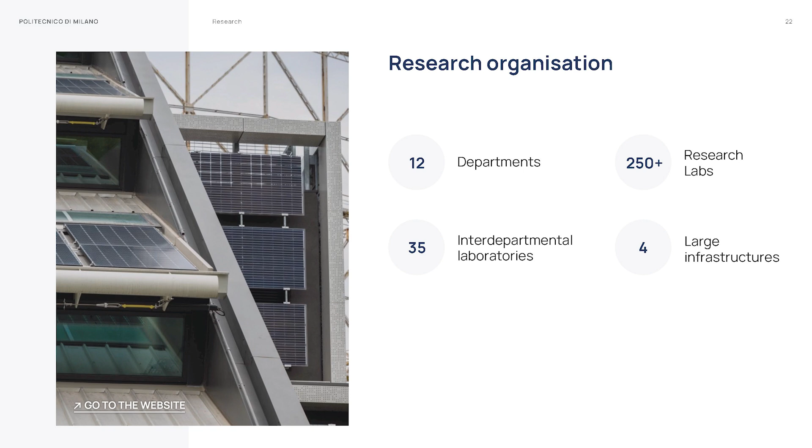I will just finish very briefly—sorry if I skip, I didn't clean up the presentation—but just to give you an idea, we also have research, the other big business of our institution. We have 12 departments and research labs. The three of us come from the second department on the left: architecture, built environment, and construction engineering.

There are essentially two departments dealing with architecture. One is more at the scale of the city and territory, and urban policies—that's the first one at the top. The second is a bit more at the scale of buildings and building technology, structures, energy efficiency—some more technical aspects, if you want to separate them that way. Then we have plenty of other departments dealing with different engineering topics.

Okay, and then we have infrastructures, and I think that's enough—we don't care too much about all these other aspects. And social responsibility programs—perhaps because we talked about social responsibility in the introduction—we do have a third line of action, which is what we give back to society as an institution. So we have a lot of projects with especially the more deprived areas of the city or the more deprived part of the population. We try to get out of our gates and do projects that involve their communities, and we have a very strong sustainability plan, equality, diversity and inclusion, and so on.

We even have some small offices in difficult neighborhoods that try to support people in decisions—for example, if someone wants to renovate their house, what should they do? Most people don't have the tools to know what to do, or know that they can access funding, including public funding. So we're there physically in these neighborhoods to help them, and I think that's an interesting way to be present. Okay, polimi.it—if you're interested, you're very welcome.

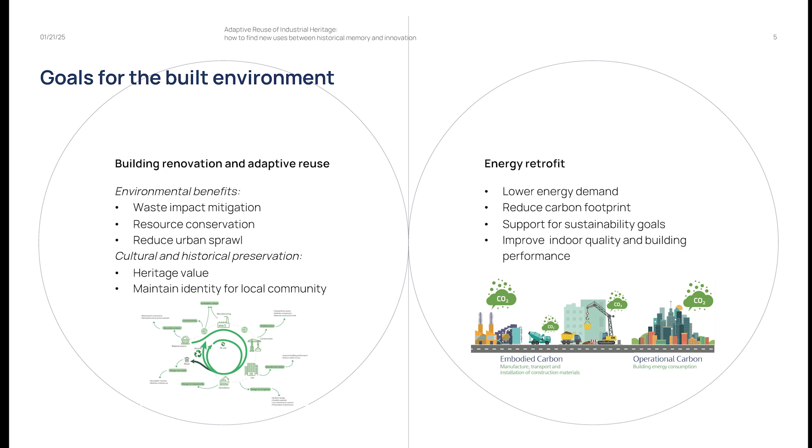Shortly, what is the adaptive reuse process? Again, typically sometimes we select a new function to transform the building, but from a research point of view, for sure we have a specific process.

We have to recognize, first of all, what is the value of the existing building and why we have to maintain and readapt it. I selected again four keywords. First of all, the history value.

We come from Italy, so Italy is famous for historical buildings. We have a lot of restrictions because sometimes we cannot touch monuments. But again, we have also a moral duty to maintain and pass to the future some aspects of our history of architecture.

Another important aspect is the building quality. Sometimes, even if it's not a piece of architecture, the quality of the building gives us a path to be followed. So why demolish a building that has quality when we can renovate it?

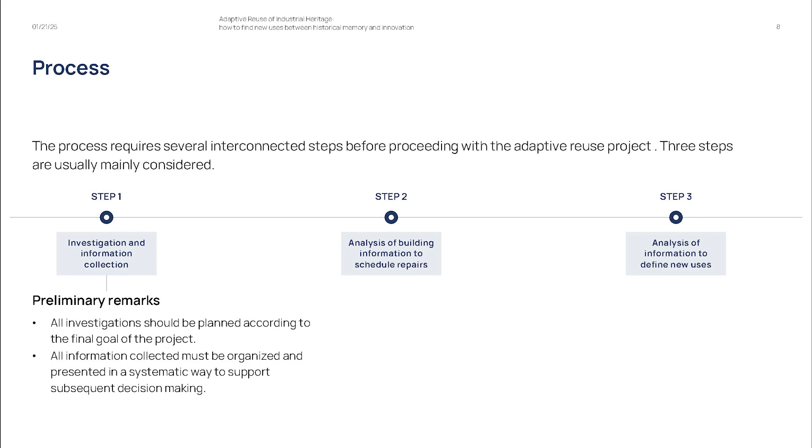The third step is really important in this moment for my lecture, because it gives you information related to the possible new uses you can introduce in an existing building to transform sometimes not just the building itself, but start a process of regeneration.

Just to give you information, we start not from the building, we start from the urban dimension, because of course before defining what is the possible reuse, it's necessary to connect the building with the surrounding, with the neighborhood, to discover if there are some elements that can suggest the possible reuse and transformation.

Of course, many information related to the building scale, because typically we need to know dimensions, we need to reconstruct the history and transformation of the building. We need to recognize some architectural value in the building itself.

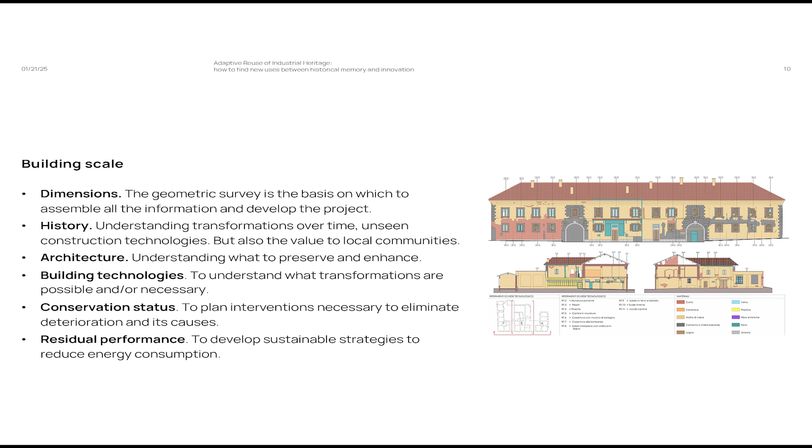And of course, one of the very important parts regards the building technologies. It's difficult to know what are the technologies they used in the past in that specific building. But connecting main information, typically the location and the date of the building, we imagine what can be the real materials they use in the construction. Conservation status are other aspects.

And for sure all the rules related to the possibilities, because in Europe and in Italy we have a lot of restrictions, so we cannot transform a building, for example, not considering the possibility in terms of volume I can realize, or some specific local rules.

So it's a circular process in reality, because when you start to imagine possible new uses, what is important to do is the analysis of the context impact assessment, because if the reuse is wrong, you stress the neighborhood. So it's important, again, to connect everything.

Building on what is already built. Of course, it's a sort of slogan.

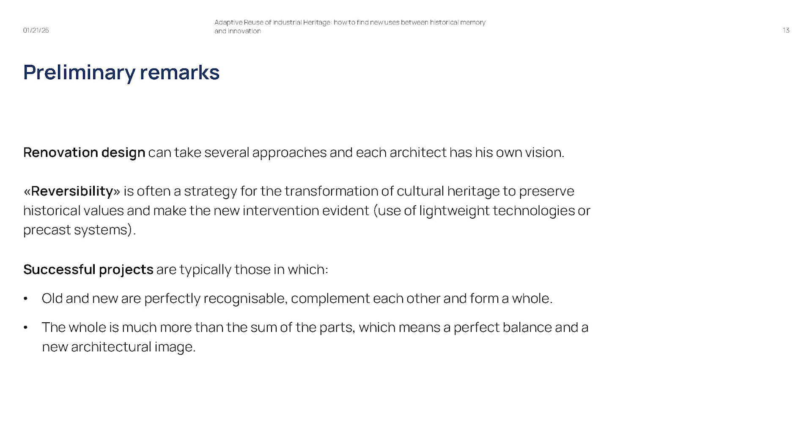Four aspects, of course, we can find many other aspects. Again, I find the nicknames, fill the volume, which means that in some examples you cannot touch the architectural value of the building, so to transform it, you have just to readapt the layouts, the existing layouts, and give a new function to the building.

Most interesting is boxes inside the volume. Maybe can suggest something related to the transformation of your building in the workshop, which means that in this case, typically, we adopt this approach when we have a huge building, industrial heritage. So we define what are the spaces that need to be well controlled in terms of air conditioning, plants and so on, and what are the value of the other parts, but I have examples of that, of this approach.

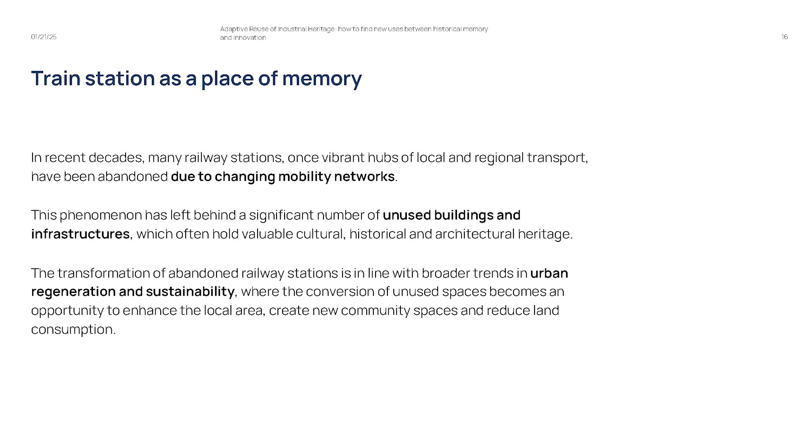Industrial heritage, the case of disused railway stations. You can find many examples all over the world of transformation, because typically the huge stations realized at the beginning of the 20th century are now abandoned because of the changing mobility network. So how can we reuse them? Sometimes it's not necessary to maintain them, but sometimes it's better to renovate and readapt this railway infrastructure.

To introduce the topic, typically we have two parts in stations of that period. The first is typically designed by architects, so the value of the building is in the relation of the building with the city. The second part I like a lot, because it represents something really important: the innovation in the engineering part, because of the new structures that allowed the construction.

Examples - I have to rush. The two first examples I selected, maybe you know very well: Gare d'Orsay in Paris, maybe you visited it, and the second one is a transformation of part of Manseibashi station in Tokyo.

Gare d'Orsay is now a museum, maybe you know it well. It was a typical station. You can appreciate in the image the value of the building. It wasn't possible to transform it in reality because it's a monument. When they abandoned it, they decided to transform it into a museum - so they selected the function.

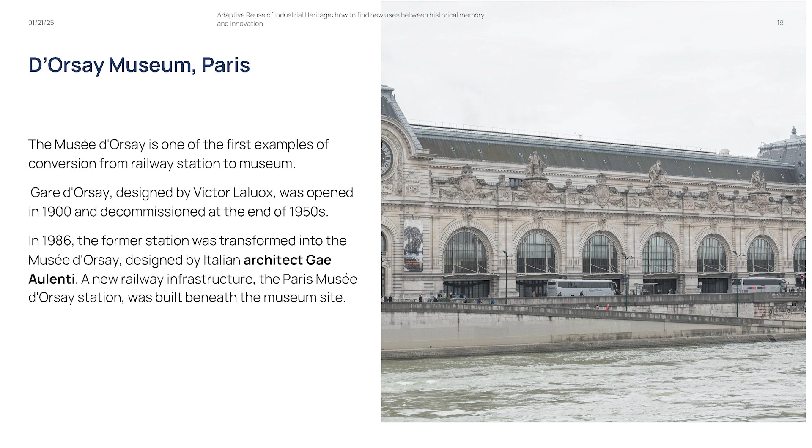The chance was that the natural light was really good also in the original building. That's why the light, which is really important in a museum, was something already present in the envelope itself.

The use of materials is an aspect that's really important, because in the meantime you enter the building to visit the museum, which is a famous museum with masterpieces of Impressionist and Post-Impressionist painters. But in the meantime, the visit is also to the building itself, because it's immediately visible what is new and what was part of the historical monument.

The integration is important - nothing is covered by the intervention. So the relationship with the structure, which was a cast iron structure really important for the period, is still visible.

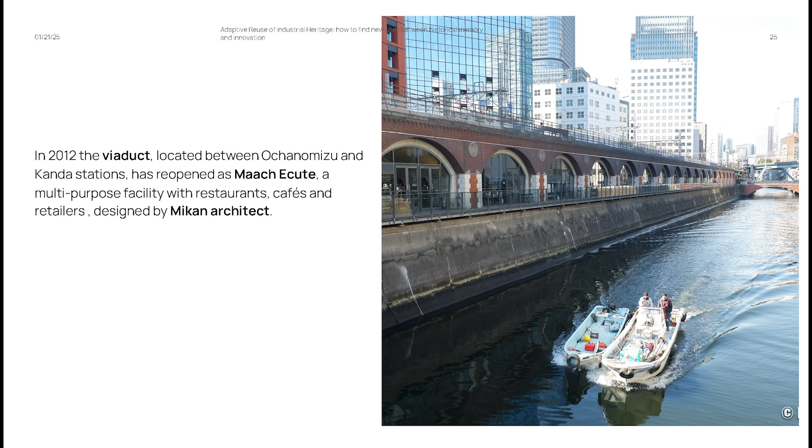It's really interesting - an urban scale intervention, because the possibility to remove the original walls and open these parts creates a relation between the main square and the opposite part, which is the river.

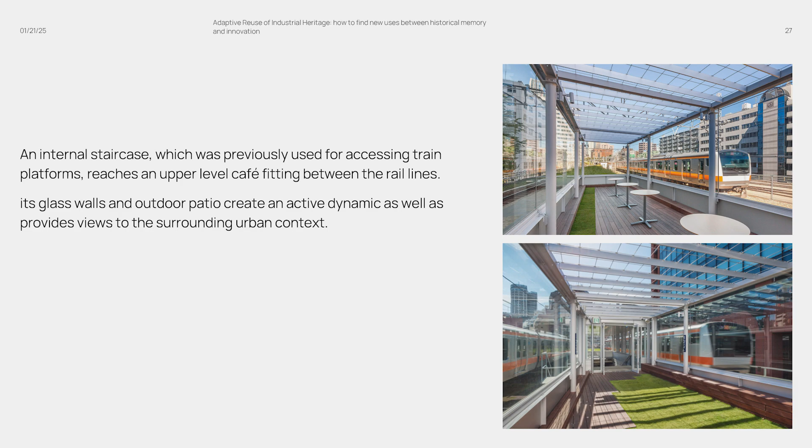Typically we reuse these spaces for commercial purposes. In the upper part, since the line already exists, they introduce small elements dedicated to bars - boxes inside the volume. Maybe they are really interesting for the workshop, why not?

We'll discover two European examples. The first one is in Spain, in the south of Spain. This station was really important in that period, because it connected this region with the capital of Spain.

When they abandoned it, the local community wanted to maintain and preserve the monument. In 2012, they wanted to reuse this building. Now it is the headquarters of Casa Mediterraneo, a diplomatic institution that has to promote the common identity of Mediterranean villages.

What is interesting in this case is that the designer, Manuel Ocaña, had to design a building with a real low budget. This was the original situation - it's a bit similar to your station.

This is the transformation. What is important is the definition of what is temporary use and what is permanent use. The huge part, which was the space where the trains arrived, is now an open space - a sort of covered square where they can organize many different activities, such as exhibitions or other things.

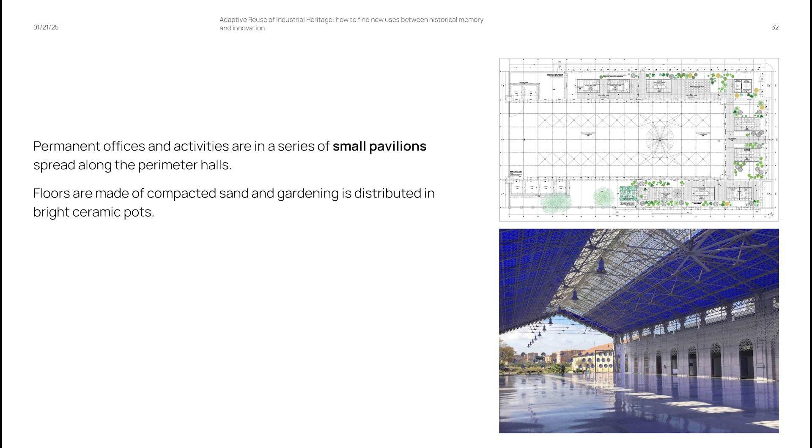Activities related to the headquarters are in small pavilions that surround the main square. Here are the pavilions again, not many materials. So in this case, the ceiling, the roof, is transparent.

So to protect the people that work inside the pavilion, the roof is opaque and the natural light is filtered by the vertical facades. Of course these spaces are controlled with plants, which means they are air conditioned and so on. Because for temporary uses it's not necessary, it's a passive strategy. So we use the envelope to create that climate situation.

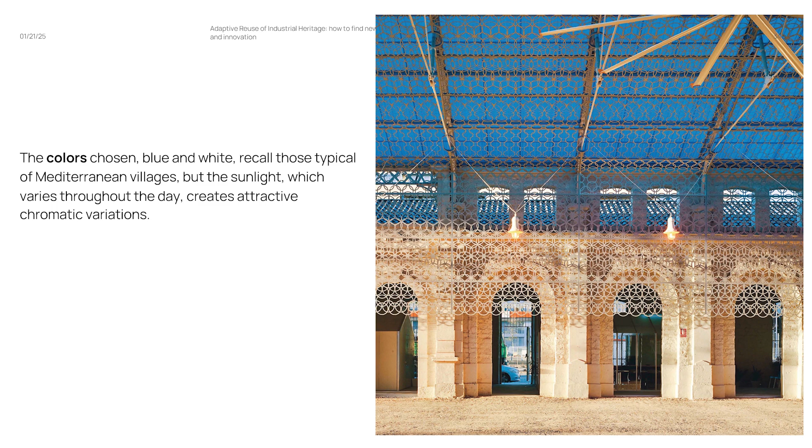Why the colors? Because they are typical of Mediterranean villages. White and blue are the two colors they use. But be careful, because when you use a transparent surface, the color of the sun will create different colors inside. The second one is similar.

It's in Belgium. In this case, a huge station, really important. The strategy is totally similar, but the climate is totally different. That's why they organize it in a different way.

Again they put pavilions inside to reuse the building, but they also create protected public spaces because of the dimension of these buildings. They can also create sorts of boulevards, green boulevards, in between the pavilions.

In this case the material is wood, so again not too many materials, but typical glass for sure, and wood also for the structure, and the pavilions are 3 floors high.

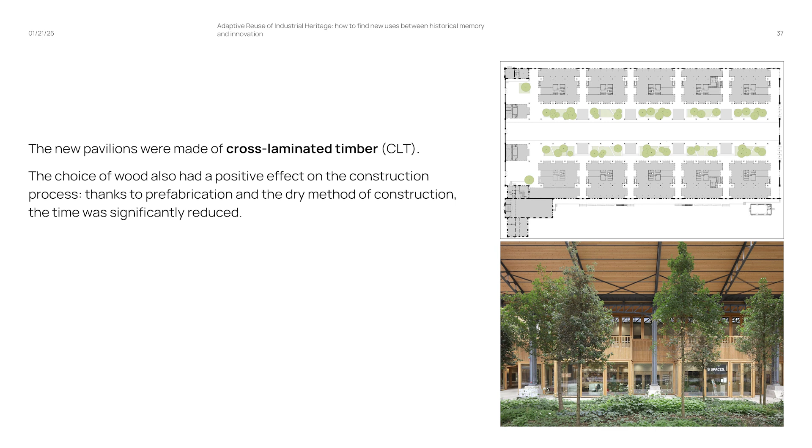Here are some images. It's really interesting because of the climate, vice versa - it's a rainy region, so it's in a cold region. That's why you can create a protected part of the city. It's a sort of building and urban scale at the same time.

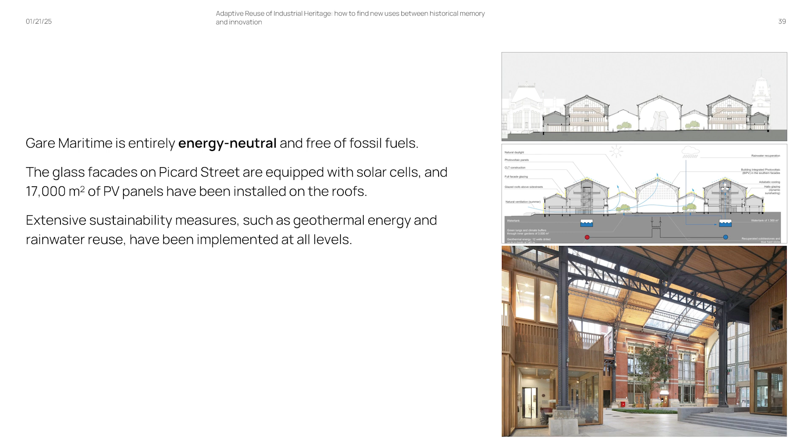It's really interesting also because it's an energy neutral building. They use a main glass facade that is integrated with solar cells. All the roofs are photovoltaic panels, and they also use geothermal energy and collect rainwater to reuse it for the green side.

Finally, a really famous intervention, the High Line. I selected this one because it's a bottom-up regeneration. What is it? Of course it's a beautiful intervention, but what is interesting is the process.

Today the High Line is really famous. It was a line that cut through this neighborhood. When it was abandoned, immediately they wanted to demolish the line because they considered it a dangerous place. Vice versa, the people that lived in the surrounding neighborhood, an industrial part of the city that was abandoned, typically young people and artists, started to reuse those buildings.

So they started to discover that naturally the green grew inside this line. So they wanted to maintain it and convince the administration to maintain this line. They created a non-profit association, the Friends of the High Line. They started to collect money. At the end, they convinced the administration to maintain it, and they started this process of regeneration.

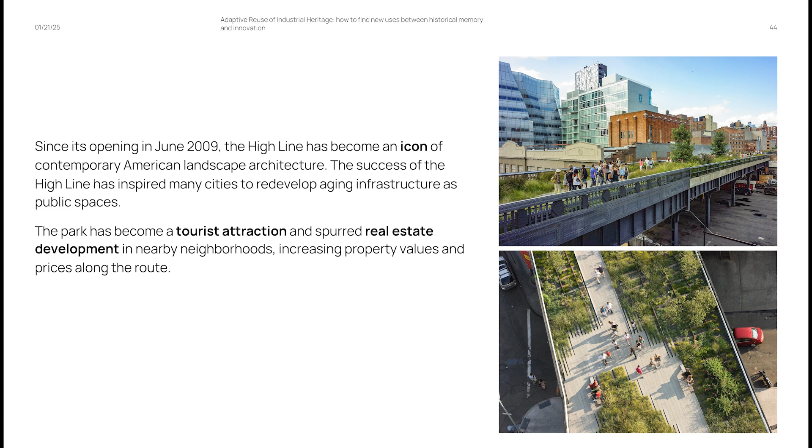At the end of the High Line, now we have an important building designed by Renzo Piano, the Whitney Museum, which creates the element that concludes this intervention. Thank you very much.

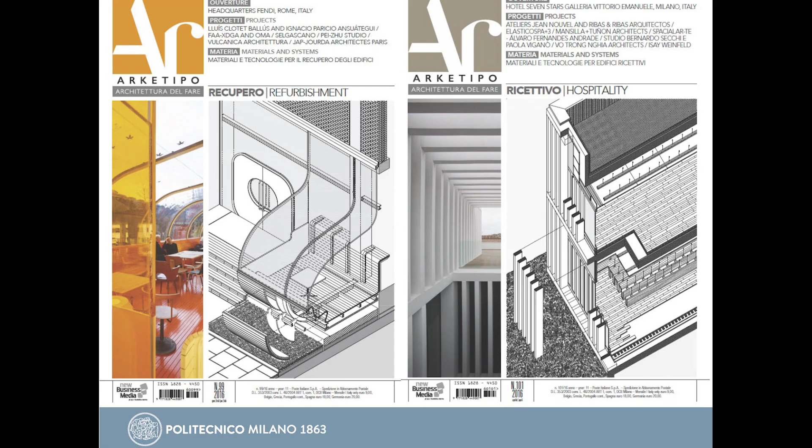The first is that I'm an editor of a magazine. To do a magazine is really exciting. And I'm also a curator of an architectural festival. This is Arketipo. Arketipo was born in 2006. Now we are at issue 180.

Every month we speak about a topic: refurbishment, hospitality, envelope, building where there is no possible entrance — these are only examples. As you may understand from the topic, the concept of the magazine is that we need to speak about the construction of the building.

We work a lot with the drawings, the technical drawings of the building, which we redraw. We search the drawings from architects, engineers, etc., and we redraw these buildings. We do something like this.

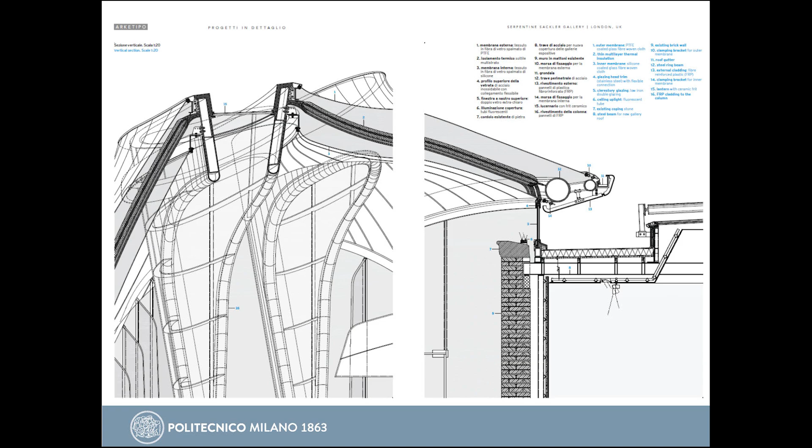I talk about this because the two stories that I tell you tonight are very much related to the work of Benedetta.

The second thing in the introduction is the festival. I think it's important to talk about this because Milano Arch Week is something like this. Every year, for one week, all the city of Milan, our city, is covered by advertising because we talk about architecture. We organize more than 100 events in all the city, the center and the peripheries, and we talk with citizens — we speak about architecture because we think architecture is a real agent to change society, to give a better life to the people.

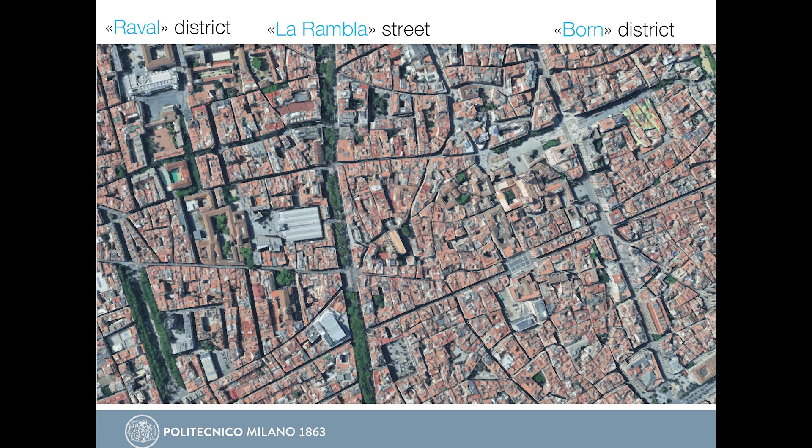This is the museum realized by Richard Meier Architects, and it is very related to this very old district. The people immediately loved this new museum, and this space is so full of people every day, at every hour, that the problems of violence and theft disappeared, because people arrive to see the museum, and so the problems disappear.

This is the other building, designed by José Luis Mateo. It's related to the cinema of this region, and you see exactly the relation between the old city — a very old city — and this new important building, very much in contact, the old and the new together.

So we are now in Bangkok. Here in Bangkok you have a lot of markets. Market is important for you. It's not exactly the same in Europe, but in Spain it's exactly the same. Also in Spain, markets are really important for public life.

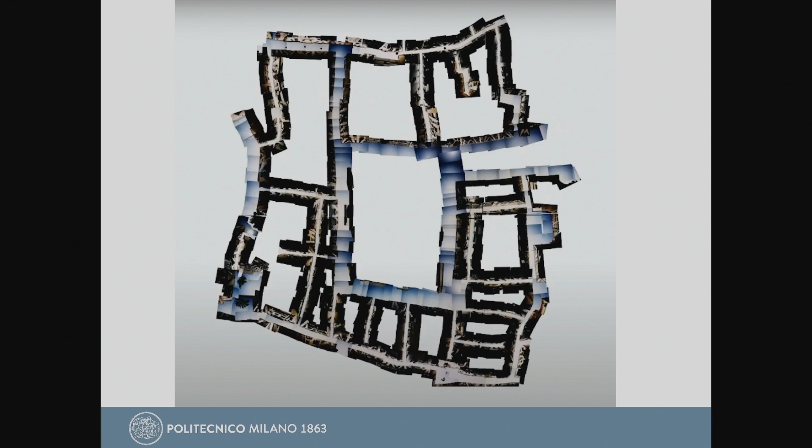Benedetta studied a lot with one of her tools: the collage of images. This is the collage used to understand what is around the Santa Caterina market, to understand the life before the transformation.

She worked a lot, and decided to break the rule of the competition. The competition only asked to refurbish the market, but Benedetta decided to participate with a project that didn't touch only the market, but also all the streets and districts around it, because she had the idea to open the street, demolishing some buildings.

She imagined that when tourists are in front of the cathedral and see something really interesting and colorful there, they need to go there. If they arrive in front of the market, they see the light, they continue, and we have a lot of people in this district, so the violence disappears, the problems disappear.

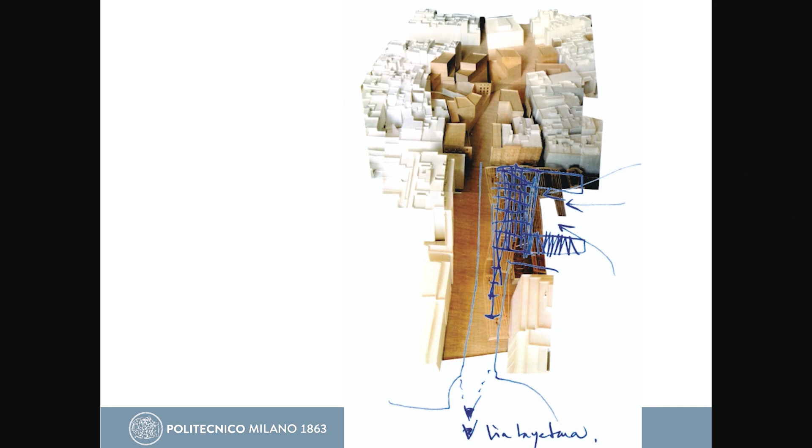With many sketches and ideas to understand the better solution. These sketches show the idea from the cathedral: you have to see the market, so it's necessary that the roof of the market go into the street with color. She had a lot of ideas, for example the drawing of the roof as vegetables.

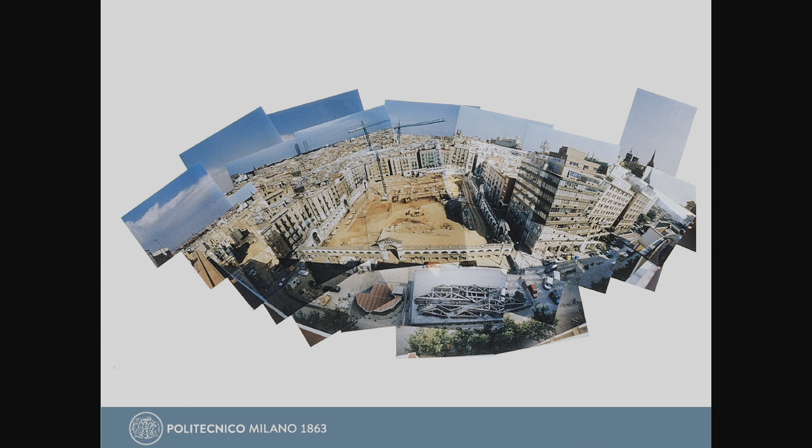More sketches, and Benedetta won the competition. She reused part of the old roof and decided not to touch the external wall, so it's very important to always see the old part and the new part. The old part is in brick and stone; the new part, the new roof, is wood, steel, and ceramic tiles.

When they started the work, they found the remains of a monastery that was here, because in Europe there is a lot of history, so we always find something.

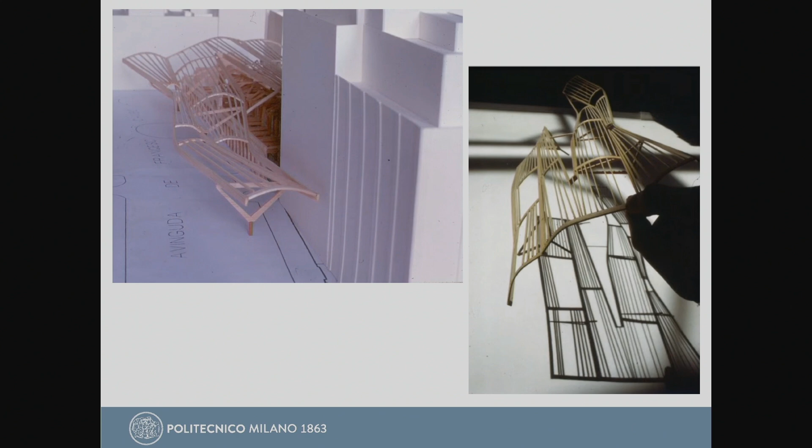This is a study for the pergola, and a lot of maquettes. Benedetta works a lot with her hands, with wood maquettes and cardboard maquettes. This is always the final result.

She needed to integrate housing for elderly people too, because the strategy to have people here is always to have different people of different ages.

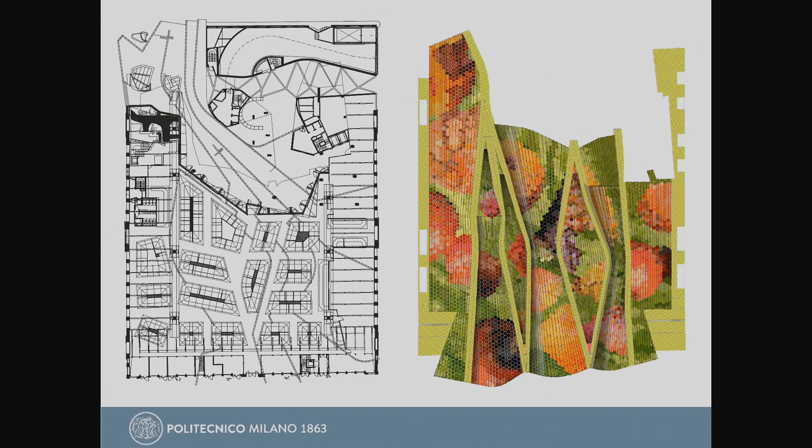This is the image from the cathedral. From the cathedral you see something like this, so there is an attraction. It's absolutely possible to work into the market, and it's quite a covered street, a new covered public street in Barcelona.

These are some images of the construction interior, the existing roof reused, the houses. This is a collage of material for one of the walls. It was really complicated to realize so many colors for the tiles.

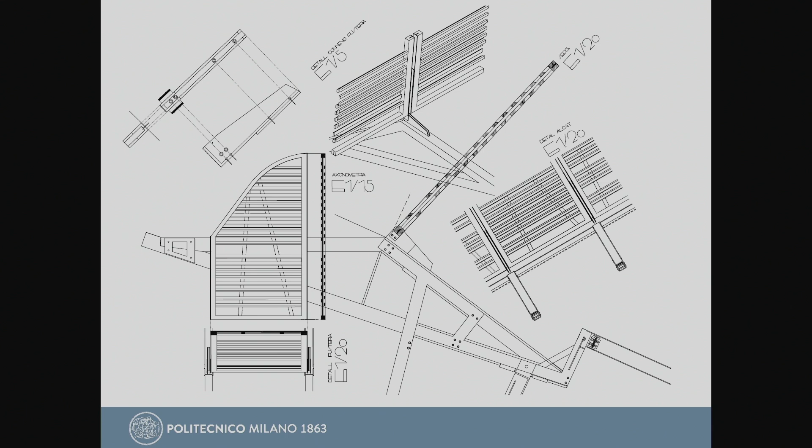And absolutely, as always, a lot of drawings to make this construction possible. In Benedetta's strategy, there is always the idea to work on public spaces and landscape design, because it's necessary to bring the city into the building, to break the difference between interior and exterior.

For example, this is the project for the Scottish Parliament in the north of the UK, where it's very cold, and she designed these gardens and this public square. She always needed to use water as an agent and element for life. This is a very big park in Barcelona with a lot of water.

It was one of the very first operations of real estate in Barcelona to build a lot of new buildings, and she realized the park into this new operation. The idea of Benedetta is always to play with forms, to play with something that is really much related to the life of the people, with colors, with curves, with surprise.

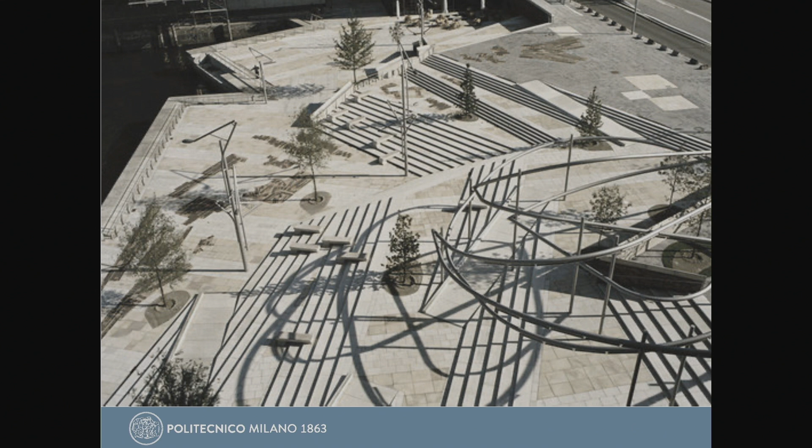This is in another city, Hamburg, in the north of Germany, where with the cold the people don't live in the streets. Benedetta changed this idea and realized this very particular, very designed square, and now all the German people need to go outside, and it is a very important transformation, this use of the public space.

And this is the last one, in Italy. In Italy there is a very important city for the sea named Rimini. It's quite like Phuket, it's plain, with a lot of people. Rimini had a very big problem because there was quite a separation between the sea and the city, and Benedetta, with this project that mixes pedestrian spaces and green spaces, breaks this division with the city.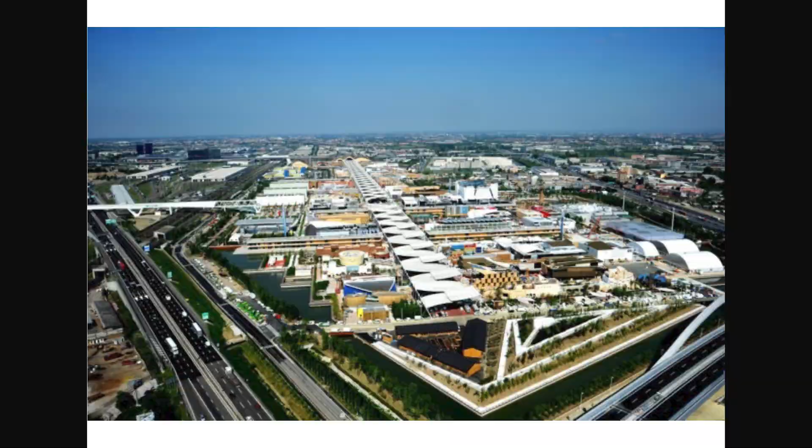It was a city with a lot of problems, a lot of spaces impossible to change, and with this big event, also the politicians, also the people, also the investors, so the private sector, needed to arrive in Milano to make a better city. And so this was one of the images of the Expo.

For example, the really famous Bosco Verticale by Stefano Boeri is one of the architectures realized in one of the districts completely transformed after the Expo. And so, with the enormous success of this building that is really known in every part of the world, Milano became really famous in the world of finance and also in the architectural world. And so we have a lot of projects now in Milano.

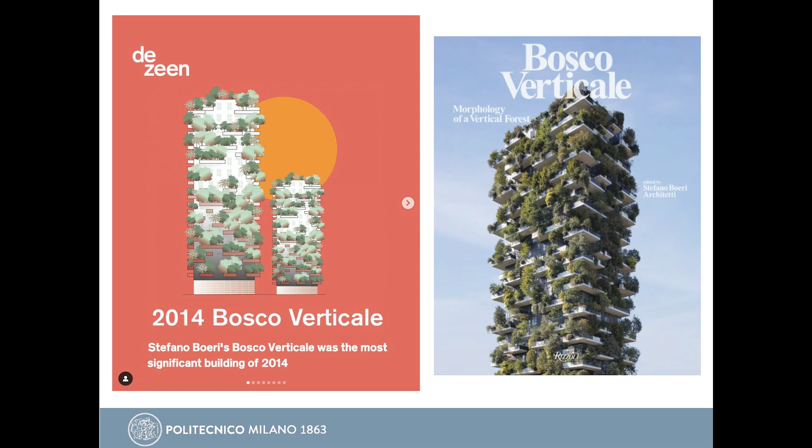And this is the second story. The second story is about the transformation of 7 big areas in Milano. These areas were the railway yards of Milan, because Milano is a city with a very interesting and recognizable geometry.

One circle was the ancient walls of the city, and one of these circles was water, because Milano was quite a little Venice in the past, with a lot of artificial canals, and water was really important for the city of Milan. In this moment we have only one part of this canal, and the other was covered to make streets with cars. This is the situation.

In Milano there were 7 railway yards in use, areas owned by the railway of the state, the Italian railway, and they used them for operational rails. But there is no reason not to use these areas, because the economic value of these areas is really big, and so now we need to change this area and create a new district.

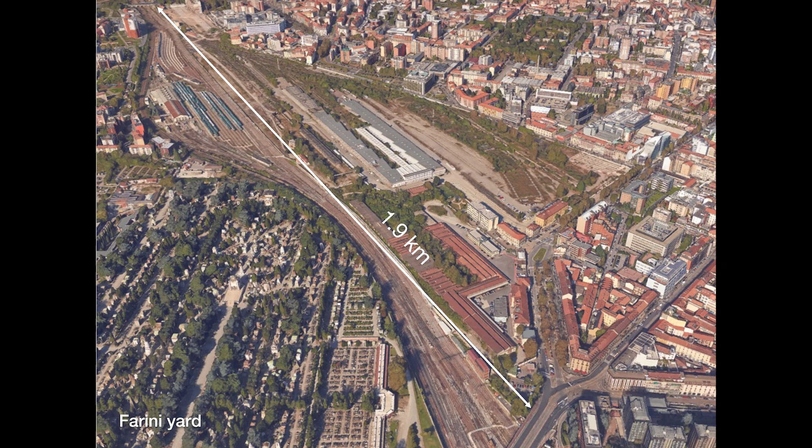I was born in Milan, and when I was here, I understood for the first time that it's really easy to go from here to here, but I don't think people believe that's possible, because usually to do this we go around. So for us it's far, but it's not far, it's really near, but it's a hidden space into the city. It's a great opportunity to enter these railway yards.

This is also the main Farini area. You see, this is the center of Milano with the skyscraper. This is Bosco Verticale.

So it's a really great opportunity to recover these yards, but it's absolutely really difficult, because the private need to gain money, to have a lot of money with this operation, and the public, the city, need to have a park, to have public buildings, to have a better life. And so it's not easy to find the good solution to start this operation.

And so what did Milano do to start with this operation? They start with a workshop open to all the citizens, a workshop open to all the citizens to speak about what you need in these spaces, what is your idea of the life in these new spaces.

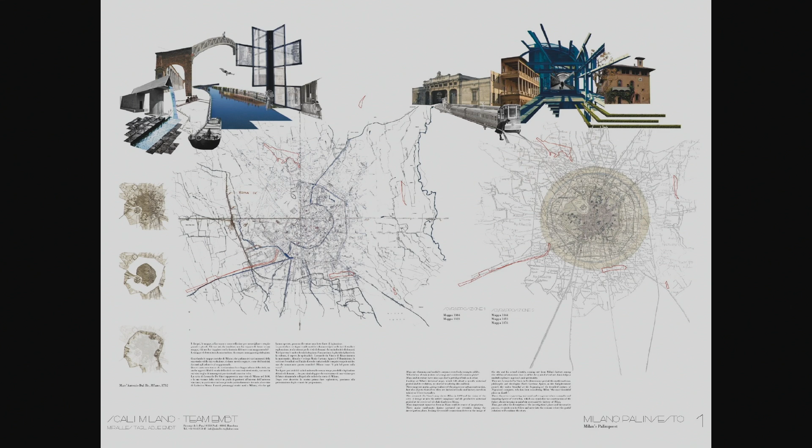We play a lot. This is the manifesto. Manifesto is manifest, but in Italian, mani is hands. And so for us, this is the manifesto we do with the people of the city to understand the idea the people have about these new areas.

We study a lot the story, the circle of Milan, and we start with this, that is a summary of our ideas. For each of the 7 railway yards, we give a new name of this district because we think it's important to preserve the memory of this new area, and so each area's name starts with the word scalo. Scalo in Italian is a railway yard, and after scalo there's always a word that conveys the main function of that area for us.

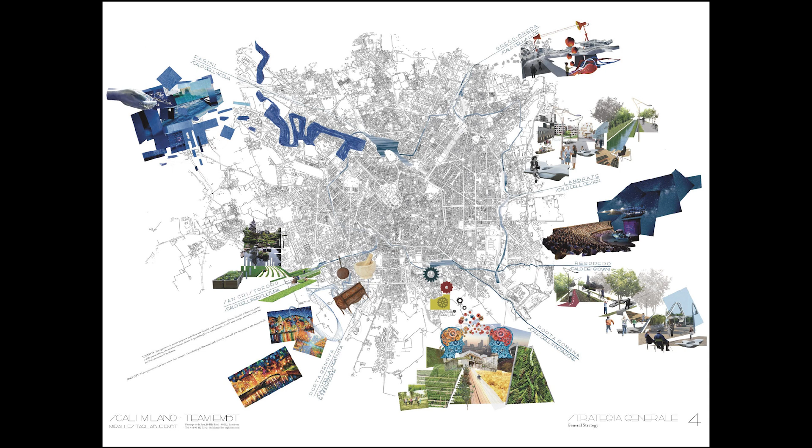And so this is the scalo, the railway yard of innovation, the railway yard of young people, of design, of the light, of the water, of agriculture, and of creativity and design. We study a lot to arrive at these 7 ideas.

We do a lot of collage to understand what is really important, and one of the things that was really important for us is to rediscover the water in Milan, and to have water in all the 7 areas.

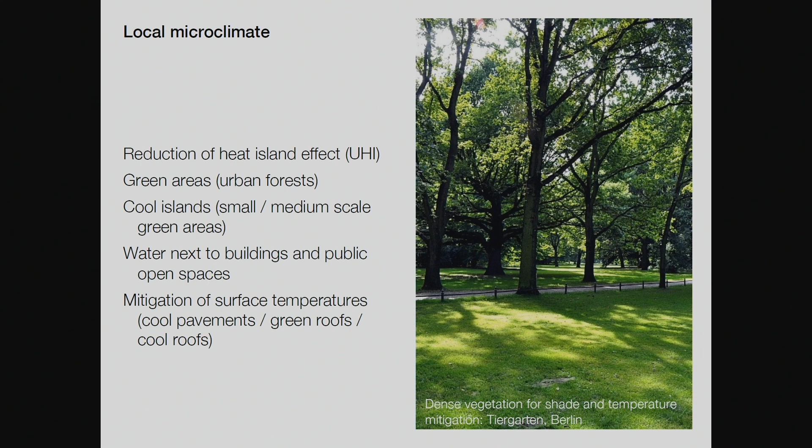We understand that it was absolutely necessary to do a lot of strategies in all the 7 areas: cool islands, green areas, water, mitigation surfaces, color and material that can mitigate, of course the water, and also strategy about the shading, for example the green gardens. But there was a lot of words, a lot of text to explain our ideas.

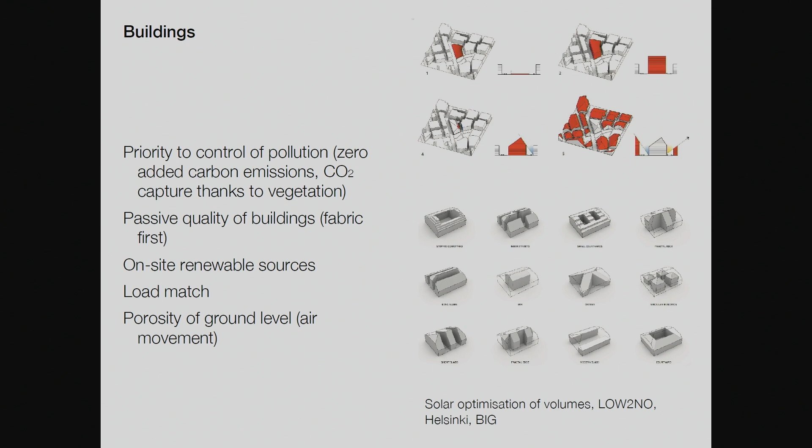We study also rules for the shapes of the buildings, for the heights of the buildings, the technology that was necessary to have, the study that was necessary to do to have good buildings in that area that is into the city, and so with a lot of construction.

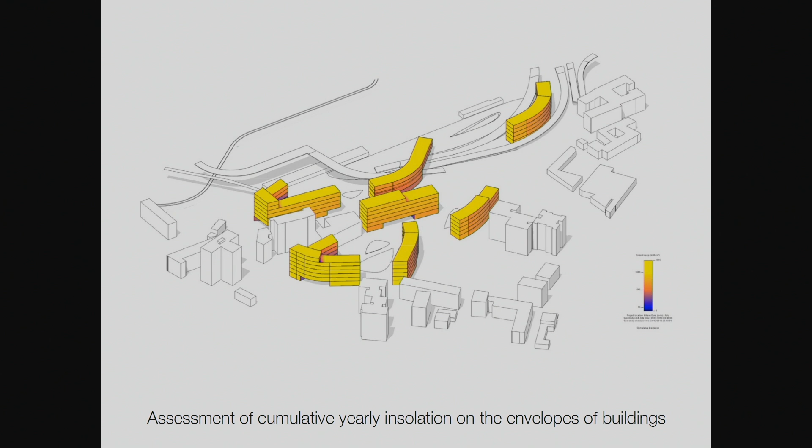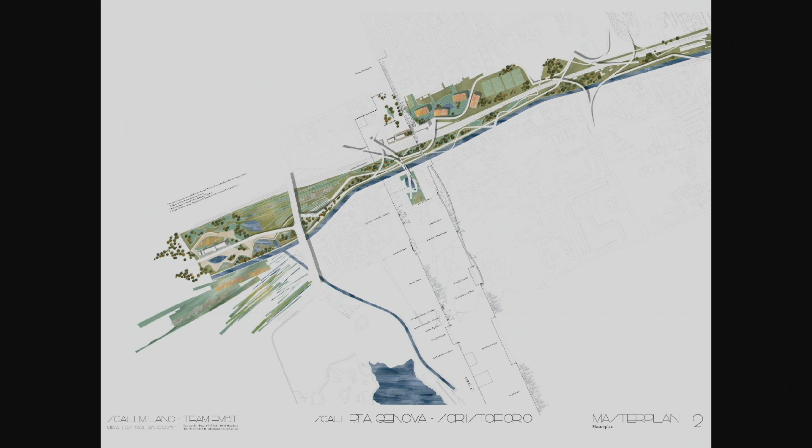And this is real. This is the old harbor of Milan, and this is the only canal that we have in this moment. The shape of this yard is strange because it was for the train, not for the people.

And you see, this is not a real project. This is like a concept. We say a vision. This is the impression. It's only the impression, not real buildings, not real facades. This is the brief we have.

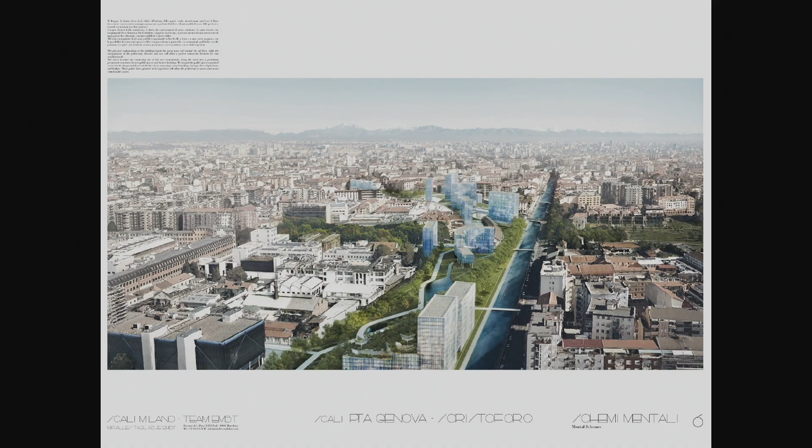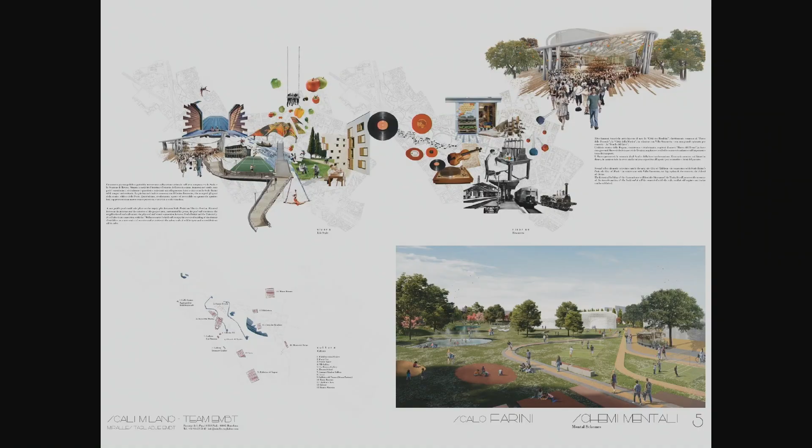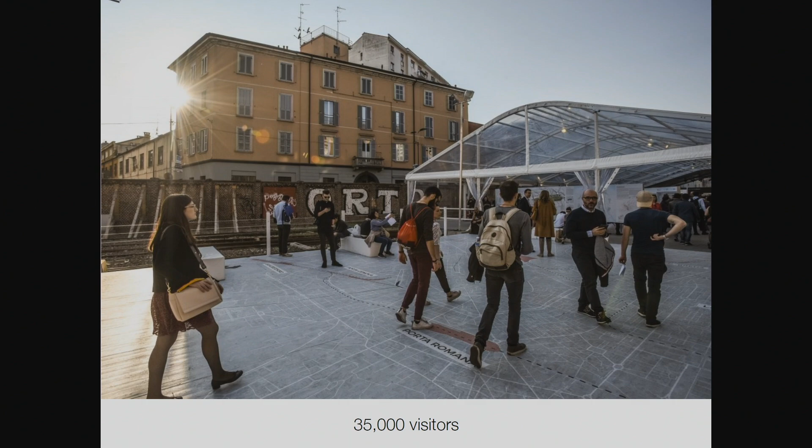After this, the 5 teams present to the city the results, the ideas, during the design week. That is the most important event we have in Milan, with a lot of people from all over the world that arrive in Milan. The event was in one of these scali, with a lot of people, and we talked about our vision. This is Benedetta. This is our manifesto with our collage.

And so after this, the city decided, okay, for us it's okay, we can sell these 7 areas to private developers to completely change these areas. Okay. For us that's good.

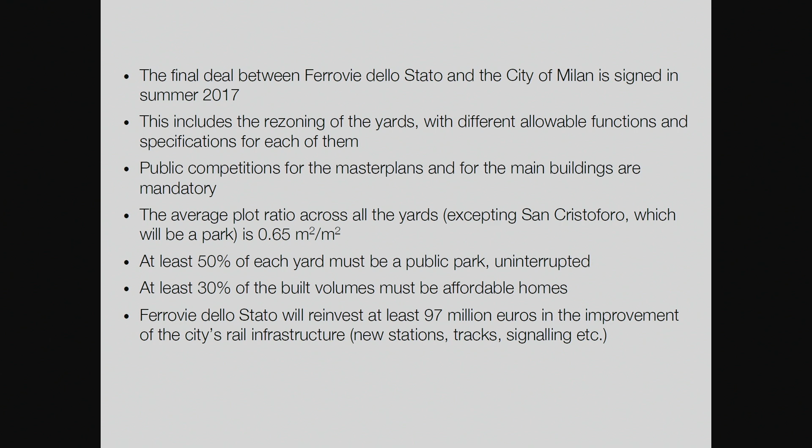And so we start with a very different situation. For example, okay, this is a number. The first scalo, the bigger one, the Farini scalo, was won in a competition by OMA Rem Koolhaas with Laboratorio Permanente, and they are quite starting the transformation. One of the others is always a competition won by Arup and Barreca & La Varra, and it's in construction.

Lambrate Yard is in a competition that we participated in, but we didn't win in time. Okay, and Porta Romana also started.

I have no time to explain all of this, so this is the proposal, the winning proposal of OMA for the Farini district.

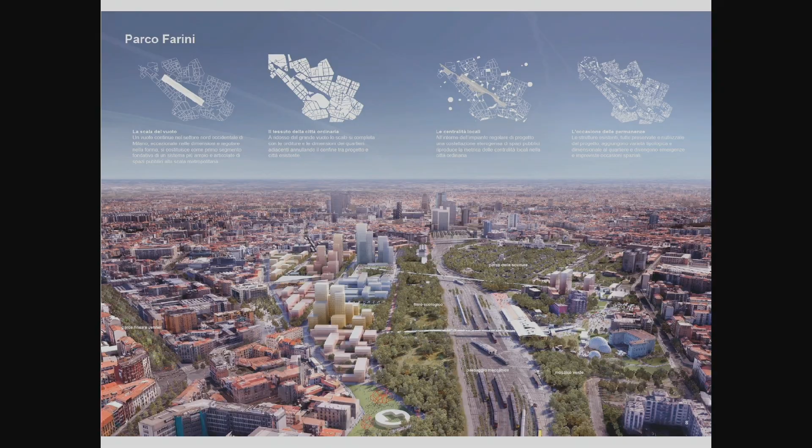It's a very open concept, a very open project, because the transformation of these areas is very, very long - maybe 40 years to completely transform these areas. So the project of OMA is really flexible to follow what can change in Italy over these decades, these 40 years. It's a project that works a lot about making important decisions, but also keeping the possibility to change these decisions.

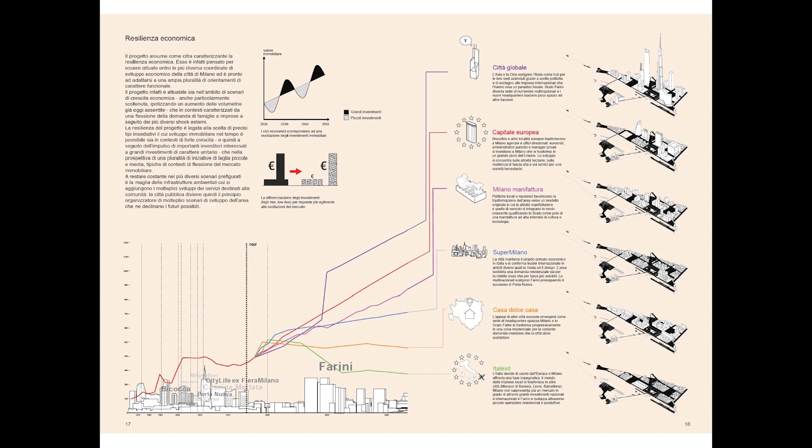So, for example, if Italy has a big disaster and exits Europe, we build very, very low. If Milan becomes the most important city in Europe, we can build a lot. And this is the other scenario. Maybe this probably real scenario was like this.

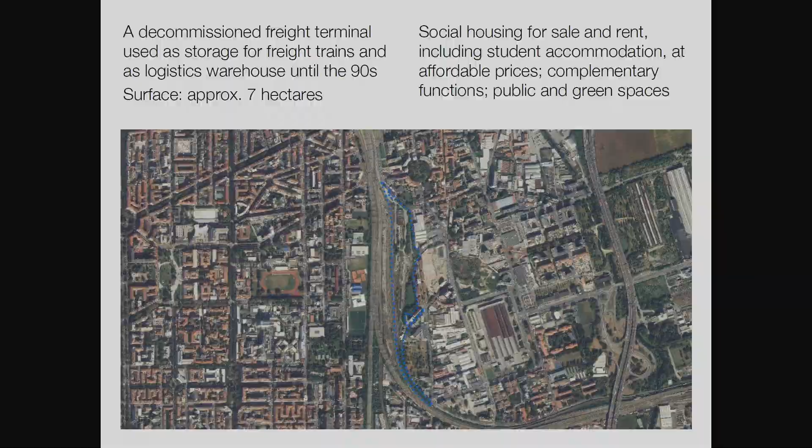This is the second one, the Greco Pirelli, is in construction. And this is Lambrate, our proposal for Lambrate - it was a competition, really near to Politecnico. It's not easy to understand what we did, because it was a reinventing cities competition.

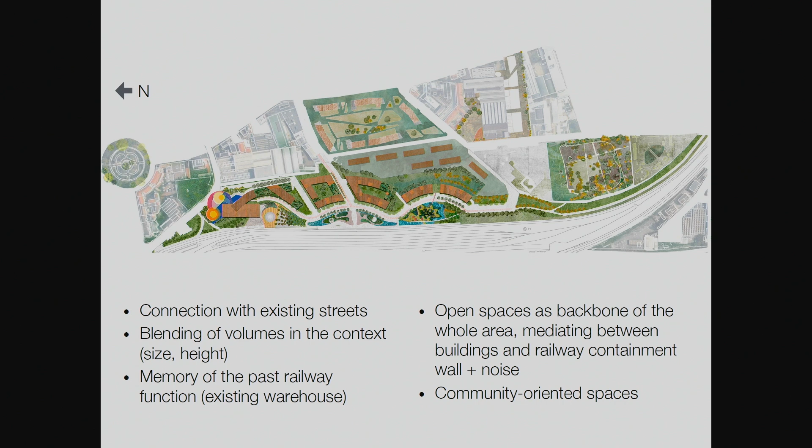We had to give a solution for 10 challenges. This is our proposal. We studied a lot. We proposed 5 new squares, each square related to an important function, and we proposed different functions: housing, student housing, public spaces for associations. This is the hostel for young people.

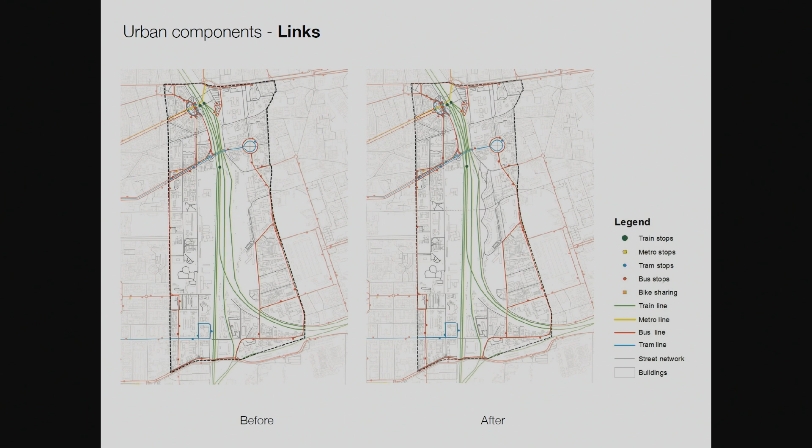And we had to study a lot because there are a lot of rules to respect. We did a lot of study about the situation before and after the project - urban studies, landscape studies, social studies. For each of the 10 challenges, we had to explain how we solved the problem.

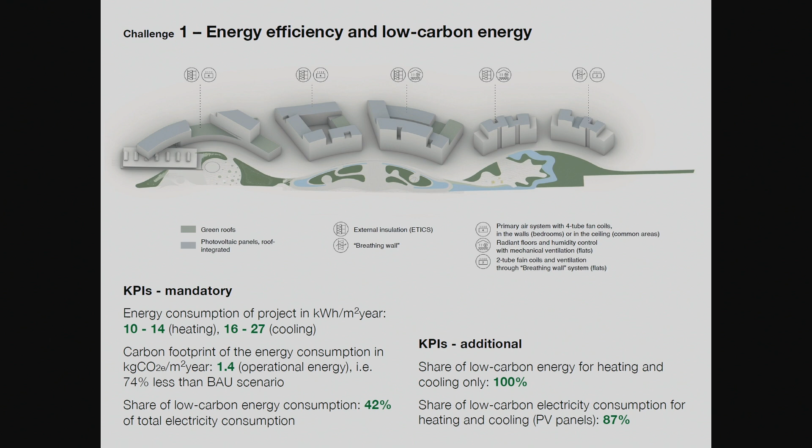With materials, with installation, with the shape of the buildings, with the age of the buildings, with low carbon materials used in the buildings.

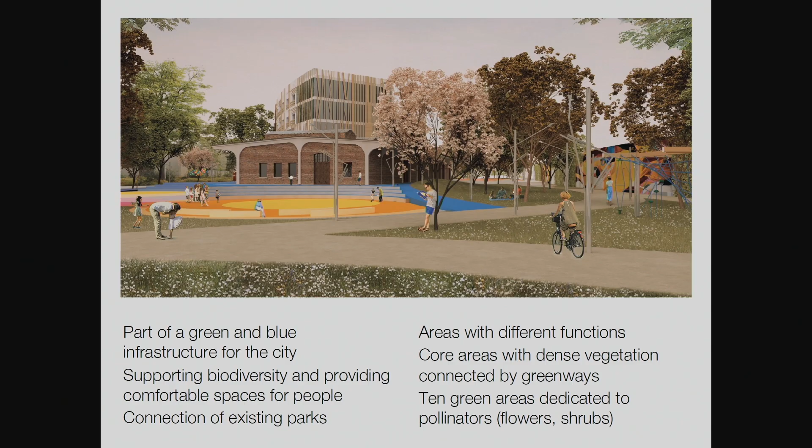One of the most important things for us was to work with the people of the districts. So, for example, the 9th challenge is inclusive action, social benefit, and community. We talked with 40 associations of citizens in the city to understand what was the better solution to have in this new district.

But we lost. Thank you. Sorry.

Matteo was very modest. We came second by a very, very, very short distance from the first one. So second is not winning, of course, but better than nothing, better than last. Okay, thank you. Thanks, Matteo.

You've seen a number of aspects that time did not allow us to go into detail on every single design decision, and there were many that had to be taken to deliver the proposal for the project, the last one that Matteo showed in Lambrate, because one of the goals of the Reinventing Cities competition was to demonstrate that the development would, in the medium term, become zero carbon across the life cycle.

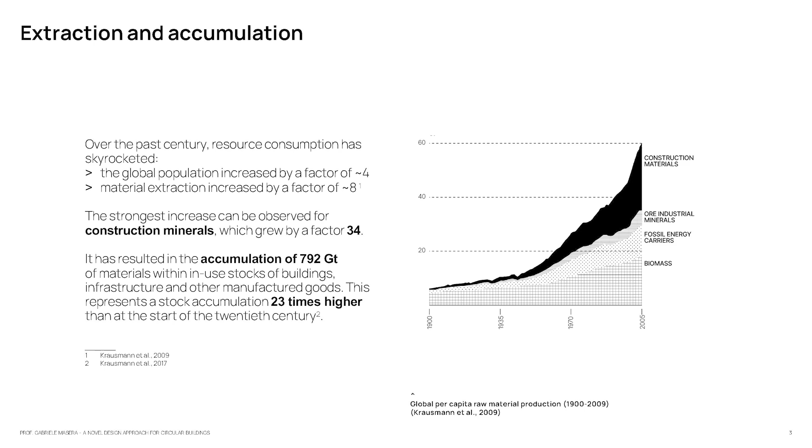And the problem is that, in that situation, the construction industry is responsible for the largest share of the world's total production of materials. 60% of raw materials go into buildings and infrastructure. So we have an incredible role: 40% of steel, 40% of raw stone, gravel and sand. Gravel and sand are used to make concrete, of course.

We are facing a situation where, as Manuela said, more and more people will want to move to cities this century. We've got to build spaces for those people. Look at the amount of sand, gravel, and crushed rock that we will need in 2050 - it's double what we use today.

Sand is already a critical material. Sand is already a material we struggle to find because a lot of people want to use it. We lived in a world up to now where we designed things imagining there was no limit, that we were just using a little bit of all the materials available on the planet. It's not like that anymore. We are reaching some limits. We are hitting some barriers. That's a big point.

I don't have big answers. I don't expect that I will give you big answers. But I want to paint the picture: increasing population, increasing urban fraction of the human population, so more and more buildings, of course, which will be required.

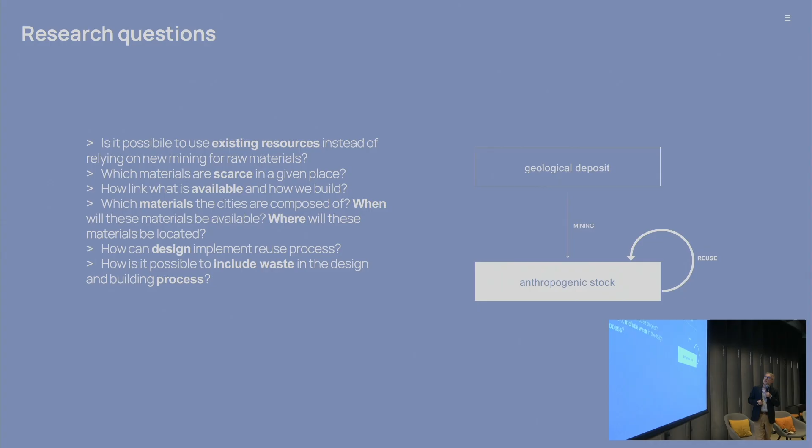So from the point of view of the mindset, what is the goal at the higher level of thinking? Up to now, what we've done is build something. Anthropogenic stock is a very academic way to say what human beings have built.

To do this, in the past, we have always looked at the Earth, at the geological deposits. We said, oh beautiful, there is some iron in the crust. Let's dig the crust, take out some iron, process it, and put it in our buildings.

Now we have frozen and invested that incredible amount of material we've seen before, which is already extracted, already used in some form. In that column, we have a certain amount of sand, gravel, reinforcement bars, and so for everything that surrounds us.

Those are materials that require effort, energy, money, life, labor to take out. So the question is, can we go to a situation where at least part of what we need comes from the stock we already have engaged now, instead of going to find materials for future needs. We will have future needs, of course, but those can be satisfied, at least in significant part, by the anthropogenic stock.

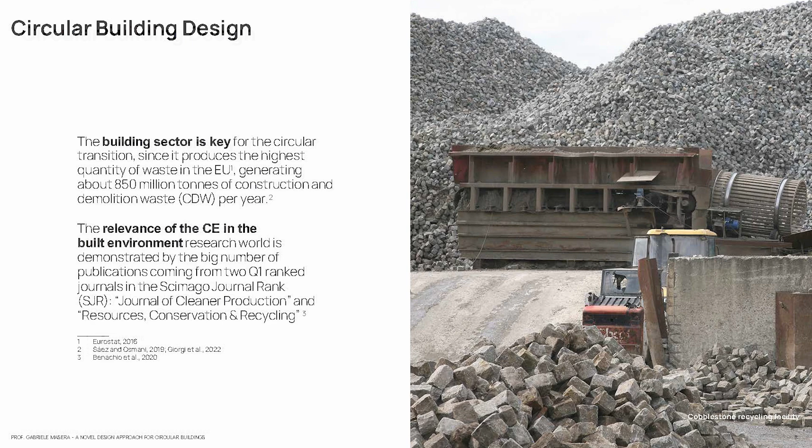It's a lot, of course, and only part of that is reused. Most of that goes to landfills and essentially becomes useless. It's lost.

This topic includes different scales. That's why I mentioned before the different scales of the building, the materials and choice of materials and components, the design of the building, the design of the city, and the knowledge of what we have in the city. It's a cross-cutting challenge that engages all the different phases and knowledge we have about the built environment.

In some cases, during the dismantling of a building, you might recover pieces you can reuse as they are. In other cases, materials like that column you cannot probably take as is, cut it, and reuse it somewhere else. You've got to go down to the constituent elements and from them create new elements, which you can do in different ways, more or less efficiently, but you can do it.

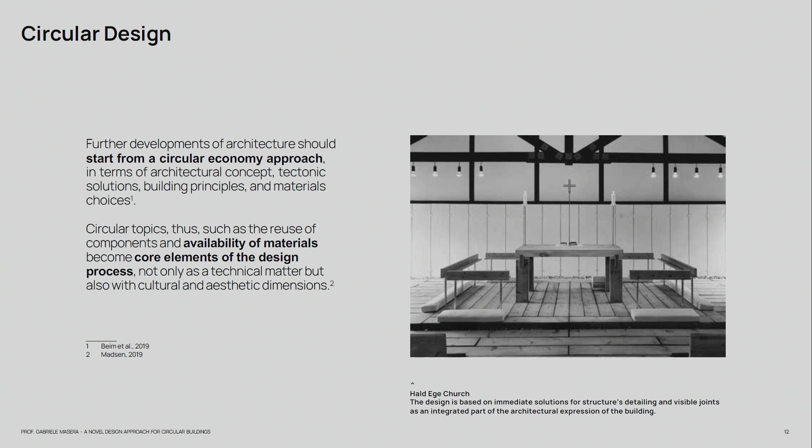How do I do it? It's easier said than done, of course. How do I do it? Because you don't find everywhere these kinds of stores and shops of decommissioned materials. It's very difficult to match the need from the designer with what the market offers at that specific point in time. There are several aspects that need to be figured out.

But in a way, certainly from our point of view as designers, we should start thinking that, again, because resources are not unlimited, the reuse of circular materials can be part of the design decisions we take as we design a building and as we select and specify the materials for that building.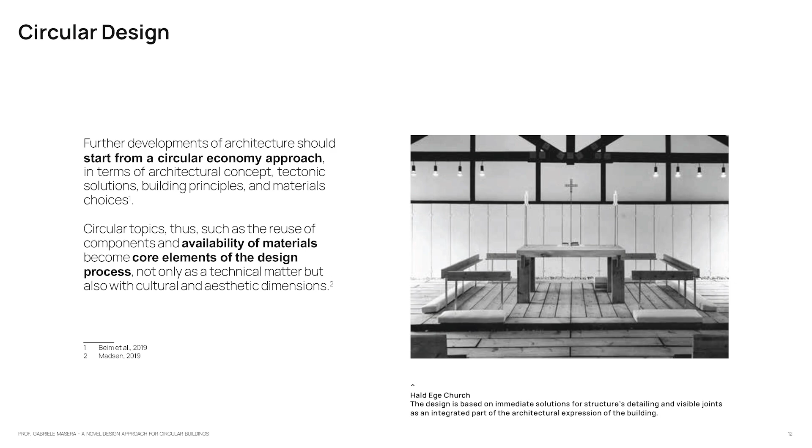So to do that, we need to form some knowledge. We need to know what is out there. So now I gave you aggregate data, but what do you do with the fact that there are 792 gigatons of materials around? Nothing, probably, right? You could say to a friend sometimes, but it is what it is.

We got to come to estimations of the materials that are embodied in the building stock, and understand how many and how frequently these materials come out of the existing buildings because they're demolished, renovated, or replaced for other reasons, and to say, okay, I understand I have a certain amount of, I don't know, concrete this year in the area of Bangkok. Can we imagine that there is a market for crushed concrete, and how much can that concrete cover of the need for concrete that the Bangkok market requires every year?

We don't know these things, I tell you. If you look at scientific literature, we are not having clear ideas about that. We know that these are important problems, and there are some efforts that you see here.

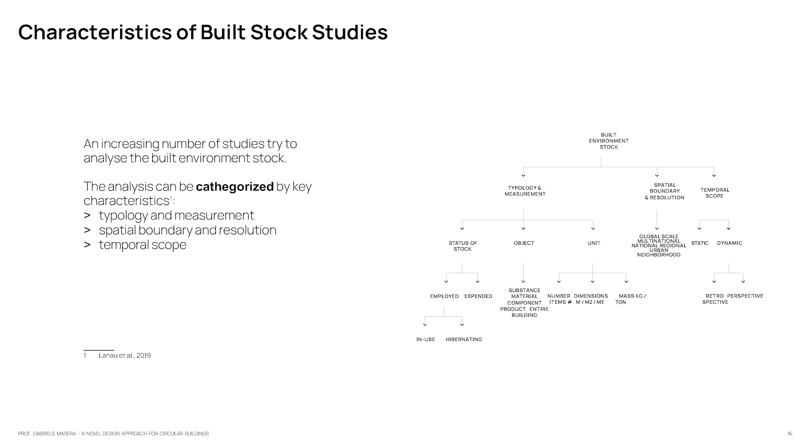So we've got two ways to do that. One is the top-down approach. Top-down is easier, so it takes information from producers and resellers of materials, typically at the national scale. You understand what comes in, what goes out. It's relatively easy, but the data is aggregated, so it's very difficult to come down to the level of decisions on single buildings.

That means we got to go the other way around, so bottom-up. Bottom-up is more precise, but more resource intensive, resource in the sense of our mind. So we've got to do a much more precise estimation of what the built environment is made of, the characteristics of the existing built environment, and then try to go down deep into these elements and understand what materials are there. I'll show you an example shortly. Spoiler, this is the route we have taken for our study.

And that is what we have in cities. That is what activates what's called urban mining. So the idea that cities are mines, big deposits of materials that are not geological deposits, but man-made, human-made deposits, and we can take the resources out of these mines, out of these deposits, exactly as we do with the natural mines that we have on the Earth's surface.

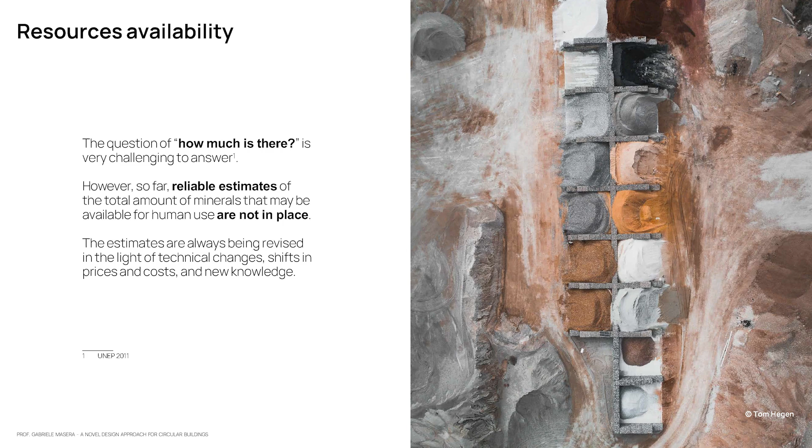Okay, there are some concepts that I'll skip because otherwise it goes too long. There are aspects of criticality. There are resources that we know are not many, resources that are scarce, but we know that there are resources that are also critical, and the critical ones are where we know that there might be supply disruptions, and those disruptions could be critical for the economy and society. If we stop finding sand, we cannot build concrete. If we don't build concrete, we have a problem, right? So it's critical.

So the question is, as designers, or people that work in the field of design, what is the point? Can we find a way to match, to align, the need of materials that we have from buildings with the supply, the possibility of finding those resources that we want to have? In this moment, it's pretty much approximate if there is any thinking at all about this topic, and things are mostly misaligned, because also there's no reliable information to know that. The question is, can we design a framework for material-aware design that has some info about the supply side, what we can afford to use, and the demand side.

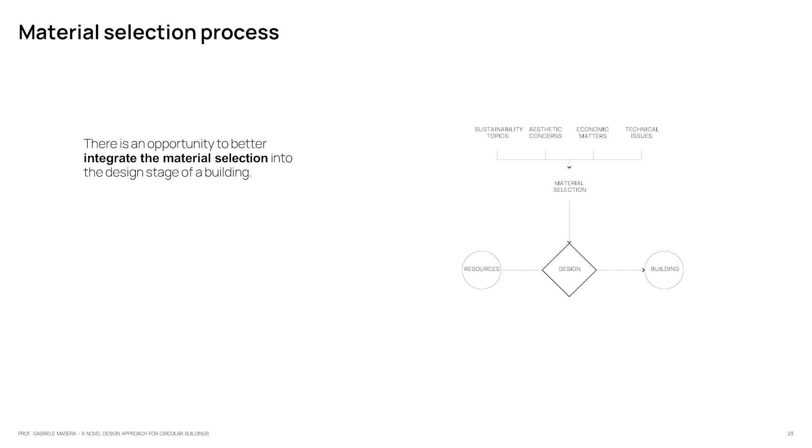The ambition is that when designers select materials, aside from technical issues, economic matters, which are leading, and aesthetic concerns, there might also be sustainability topics that must be taken into account. Today it's probably more common to find designers aware of carbon emissions, and perhaps you'd choose wood because it has negative carbon emissions rather than steel or other metals which have high emissions. But we would like material availability to also become part of the discussion, something designers become aware of.

On the other hand, we have to know the knowledge about the resources that are available. Those resources might be virgin, the ones we take from natural resources, or secondary, circular, coming from existing material stock. I'm sorry, it has to expand, but it becomes more complicated.

For virgin resources, we do criticality assessments, to understand if it's critical, how many natural reserves we have, and so on. For the existing material stock, we do material flow analysis, top-down, the one I mentioned before, or bottom-up estimations, that tell us how the material is distributed. I will show you in a moment how this is done.

But once we know the resources, we have this info connected to material availability, and the designer can make informed choices, at least knowing what he or she is doing, what is being selected, and how this selection is part of a bigger picture which includes the limited availability of materials.

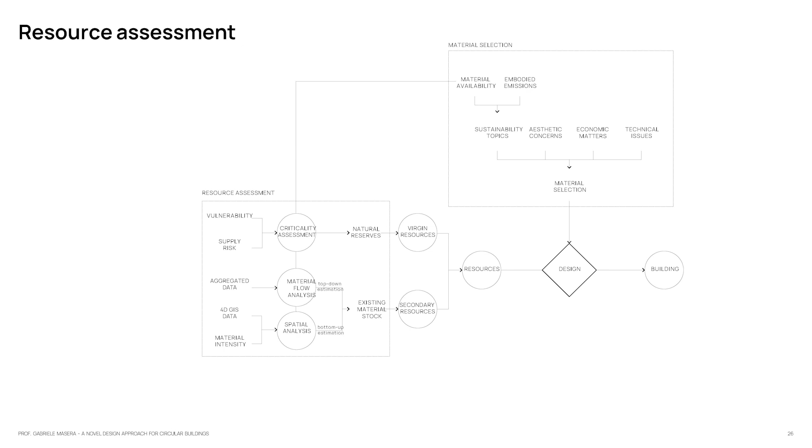A model is not the reality, of course, as you know very well. A model is a representation of reality with a reasonable degree of approximation. So we started from a number of sources: GIS data, information about the construction year, the typology, the height, the footprint, to come through the definition of some archetypes that are repeated, and the size of the buildings, and the understanding from literature about what materials were used in different periods of time to build some types of building, to try to understand how much material there is out there.

It's a model, okay, so it's an approximation. It doesn't have the expectation to be precise and to know that that building exactly has those kilograms. But at least in terms of order of magnitude, that's what we wanted to do.

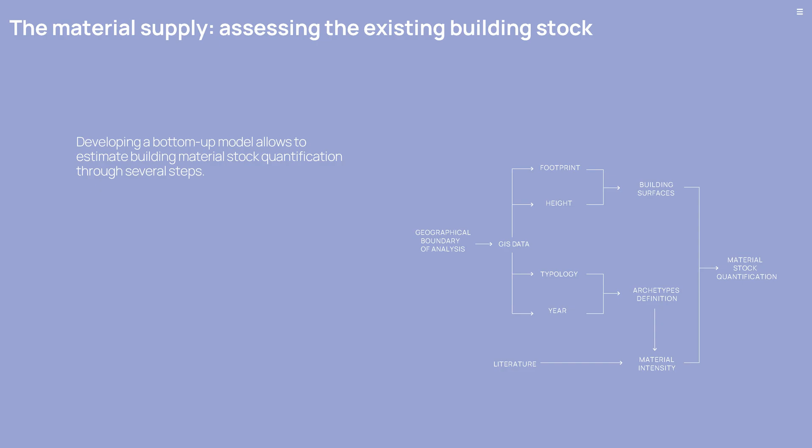So we started from GIS information that's publicly available about, in this case, the function of buildings, the total gross floor area, the year of construction. This is an area that you see starting late 19th century and was developed mostly during the 20th century.

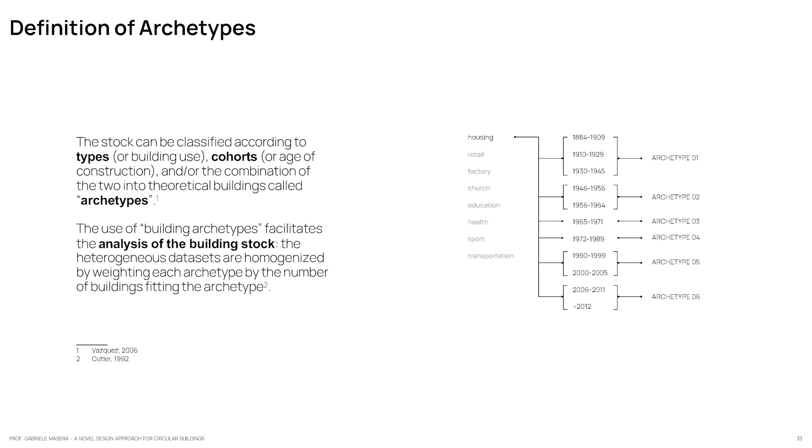We defined, based on literature and books of standard practice and so on, some archetypes based on the age. We consider essentially housing being most of the functions in that district. And then we say, okay, that's archetype 1, archetype 2, 3, 4, 5, and we had some information about the geometry, how much wall-to-window ratio we have, and so on. We essentially remodeled the city by approximating, saying, if the building is residential from the 1920s, very likely it will not be too different from that one. So again, it's an approximation of reality in a model.

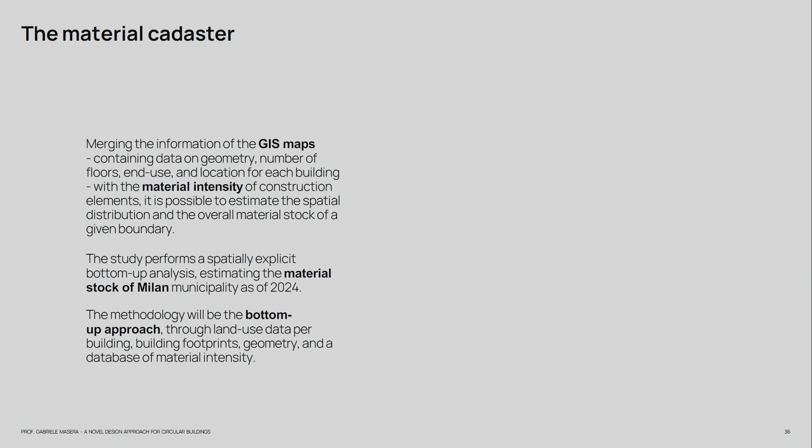Once you know the type of construction in the different periods, we could do essentially a materials list for each of the archetypes, and then we came to what is called in literature a material cadaster, a list of the materials you have and where they're located. We got diagrams showing, for example, wood—the colors are the same even if the numbers are different—but in each case it's cubic meters of materials, and you can spatialize them.

You can say where they are located in space. You can build a map of the city with the intensity of materials available across the city, with different colors and so on. There is a lot of bricks because that's late 19th, early 20th century.

And then some other parts are also about concrete and so on. The final step is looking at what happens in time. Those materials are frozen—when are they taken out of the existing building stock and made available for new construction? So they enter the circular economy process. To do that, we've done estimations about the life cycle of the building, the age, the renovation processes—again, some assumptions. We've seen that some materials become available more quickly, some less quickly.

This diagram isn't entirely accurate for the moment because this is the cumulative amount of materials, but of course you don't let them out—they're out there and potentially someone uses them, so it should be something more oscillating. But the idea is this: we got to spatialize it.

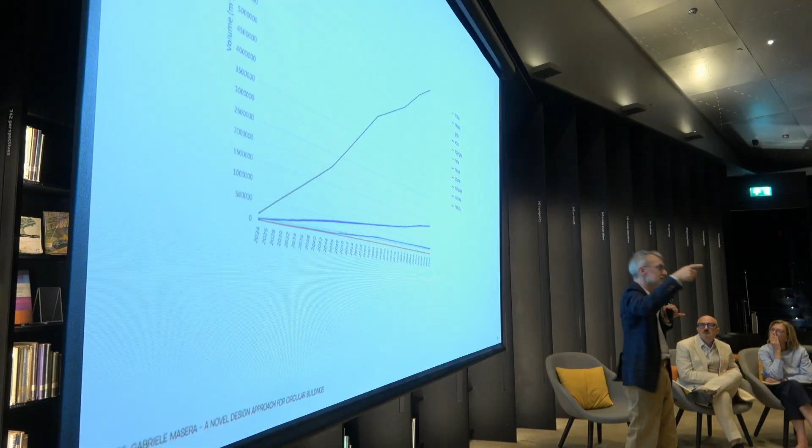So we know, for example, I want to take my material within a radius of 50 kilometers, something like that, and how much of each material is available every year, or in a time step, which makes it possible to take decisions. So when we know this, we can compare that availability of materials with the materials we need to build a building.

Circularity potential in terms of: okay, now we know the materials—can you source those materials from secondary sources, from the circular economy? Yes or no, and that might be different for each of the material categories, of course, and we can come down to a certain circularity potential.

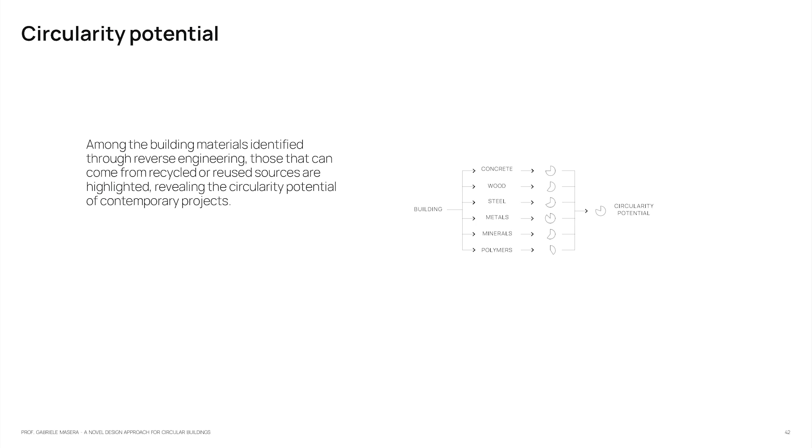And then, of course, there will be the market, some more or less expensive materials. There will be materials that can be found in the area, so urban mining. Some other things could be from recycling off-site, far away from the site, or directly reused on-site if it's a demolition work—maybe you reuse the crushed concrete, for example, and so on.

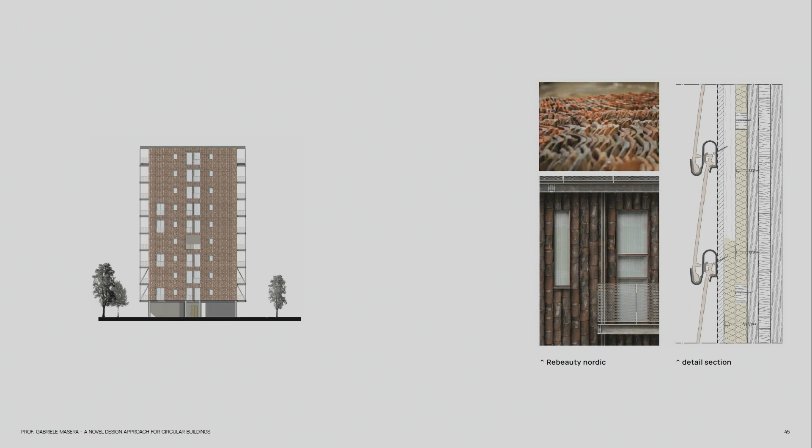We started applying this to some final thesis projects of final year students—a housing project, pretty regular housing, where we try to understand how much circular material can we use here. Some of them are materials reused as they are: metal grills, walls, even electrical ducts, or roof tiles that can be used as facade cladding, rain screen cladding.

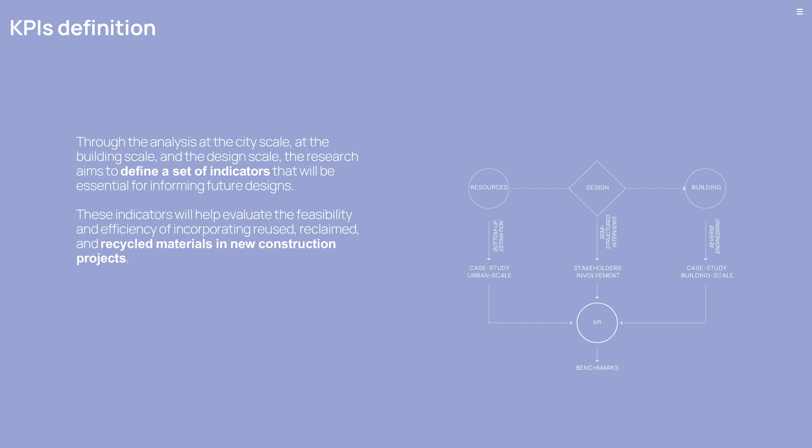Once we've done that for a significant number of buildings, we'd like to find benchmarks essentially, and define what benchmarks are reasonable considering this availability of materials on site, and then using other indicators—but that's something still going on, and we're testing this framework that is designed here.

That's the theme, and I'd like to conclude with a sentence by Jane Jacobs, 1969, who, being the very good scholar that she was, already said that future cities will become huge, rich and diverse raw material mines—and these mines will differ from any now to be found because they will become richer the longer they are exploited, and new veins, formerly overlooked, will be continually opened. I think this is an additional layer, an additional ingredient to design, that I hope will also stimulate all of you during your career. So thank you.